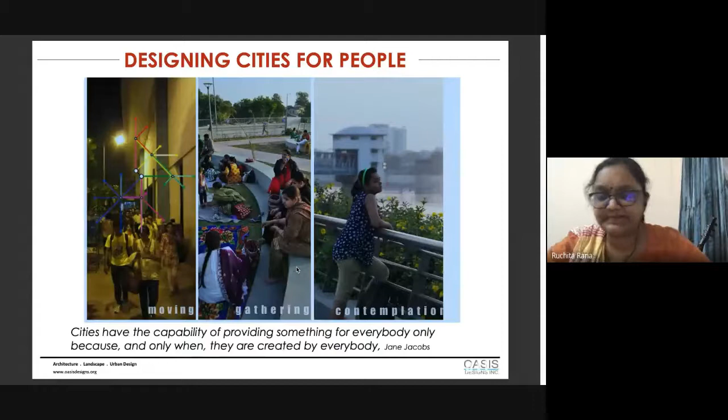So Oasis, actually I've been with Oasis for the past 12 years, and we have worked on different scales. We have combined mobility, water, sustainability to work in the realm of streetscapes, urban parks, waterfronts. So you name it, like any public project, and we have done it. So every project is different. We have done streetscapes in around 10 cities now, but even if there are similar problems, the solutions are all different. So I will just run you quickly through.

One more thing, I'm not getting into that whole debate of we don't need cars and we need walking and cycling, because I am assuming all of us are on the same page and we all believe that we need sustainable eco mobility, that is walking and cycling. And so I'm not getting into that part at all as to why we need walking and cycling, because I'm assuming that we all believe that we need to have streets not just for cars but for walking and cycling.

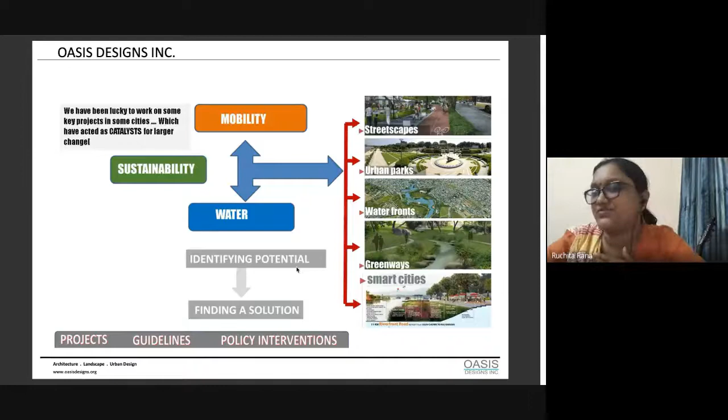Before this, we would put pictures of Singapore and Hong Kong and Manhattan, and we would say streets form the image of the city. But now we've got our very own JM Road, and it's actually become an identity. Even if you see it anywhere: oh, this is Pune and this is JM Road. So we have seen things transform, and we really now believe that streets form the image of a city.

You design a building, you design a park. Other than the landmarks, you don't really correlate to a city. It's only the streets, because the first thing when you land in a city is you always hit the street. So that's the memory that you have. Jaipur, if you go to the Chaupar, that's the memory of Jaipur. Somebody tells you Jaipur, it quickly comes to your mind: those nine grid pattern streets and stuff. So streets actually form the image of the city.

And streets actually is a big topic. If I want to open up, I can open up from a network planning aspect, from what should be the block size, what should be the distance of the streets that come in. They are mobility corridors, they are utility corridors, because they are easily accessible. And most of all, they are one of the largest platforms for human interaction.

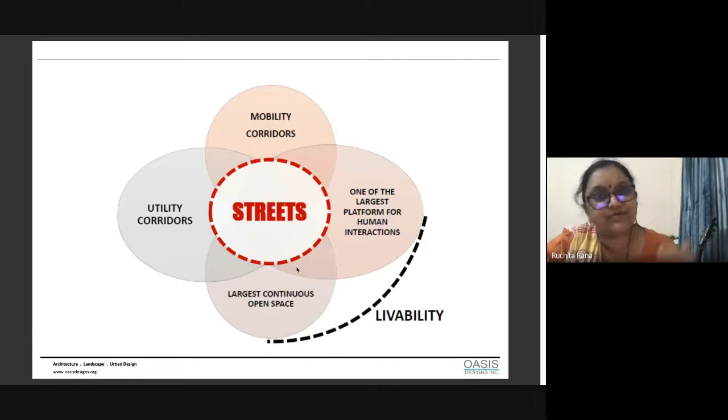The role of an urban designer is to ensure the streets have the livability, have the placemaking aspect, to create a memory, to create a picture in your mind. That is why I am here. I am not here to ensure that there is no traffic jam, or to see to the utilities. I am there, but my main aspect is how livable these streets can be. So I will just touch upon that part.

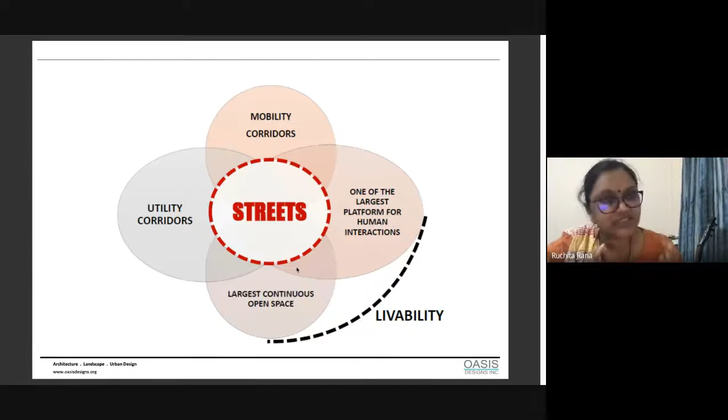So before getting into it, there are some non-negotiable points we always have. Every city has a different character and different challenges, but there are a few things which are non-negotiable. One is the equitable distribution of road space. This is one of the most important factors, because every time we go to any city, we are told there is no space on the road, we want more traffic lanes, why have you come, and who will cycle and who will walk. So ensuring equitable distribution of road space is very important, and for that we really need to question the traffic lane widths. We also need to question the IRC guidelines.

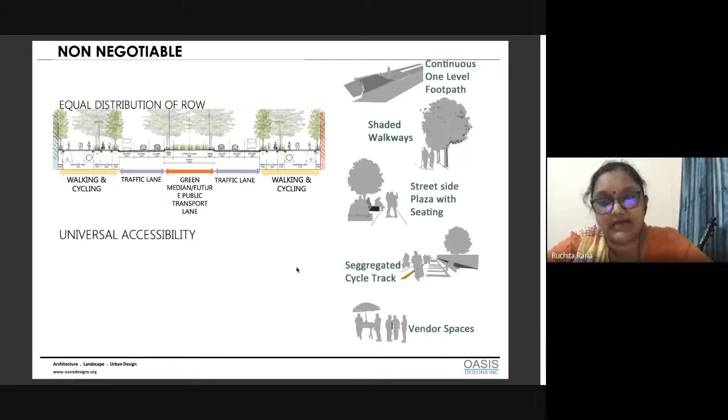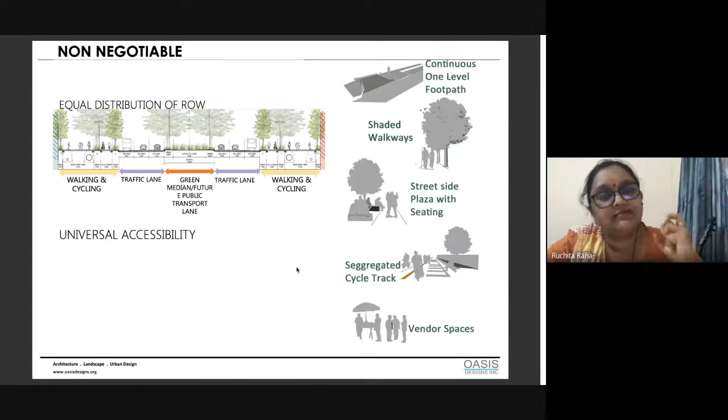We have guidelines, but we really need to question all of this, so we ensure equitable distribution of road space, universal accessibility, continuous one-level footpaths, shaded walkways, street-side plazas with seating, segregated cycle tracks wherever the road widths allow, and vendor spaces. So these are your non-negotiables. As I explain JM Road, I'll show how we got these non-negotiables on ground. This is what we did, nothing else, and that's how the whole project has come up.

So coming to the JM Road story. Broadly, it's the Pune Streetscape program. We were appointed by the Pune Corporation to do 35.5 kilometers of roads, some of which are mentioned here. JM Road is this road over here with 5 important junctions. As per the DP line, the development planning line, it's 36 meters, and the total length is around 1.87. Currently it is one-way traffic movement, and it will have a metro pretty soon.

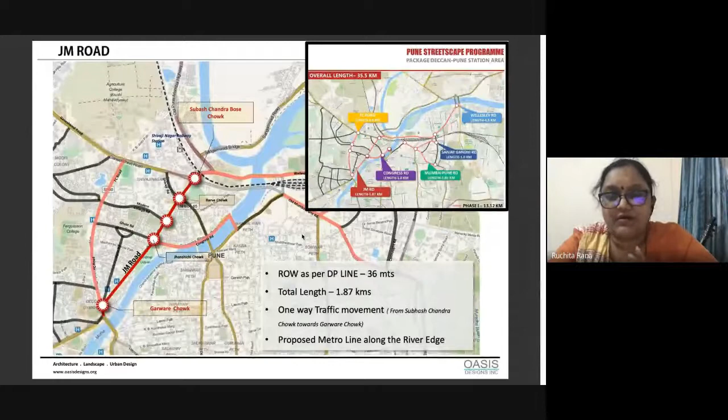So a broad placement of the project. Now the main spirit, you know, when we hit the site, we could just see the trees. That was the main spirit of this place. Every place has its spirit, and you just have to feel that. So we thought, okay, this place is only there because of those rain trees. So everything and anything has to happen with the trees around, you know, around those trees.

So now, like I told you, this is 36 meter ROW. This is one way, and still the engineers told me, madam, where is the place? I understand if it's a 15 meter ROW, there will never be space as per the engineers or the bureaucrats, because the cars would always want to encroach upon it, right? So just imagine 36 meter one-way traffic, and still we were told that there is no space. Maybe we can just go with walking, and we don't need a cycling track, who cycles, no one cycles, and all these kind of things.

So what we did was, we first started understanding, we zoomed out, we understood the character, and we saw how important JM Road is as part of the city network. So when we talk about whole to part, we saw that it actually forms an important city level link. So it needs to have some constant speed, it has to be friction free, but it had its own local dynamic. It was an important north-south connector, if you see over here, this road.

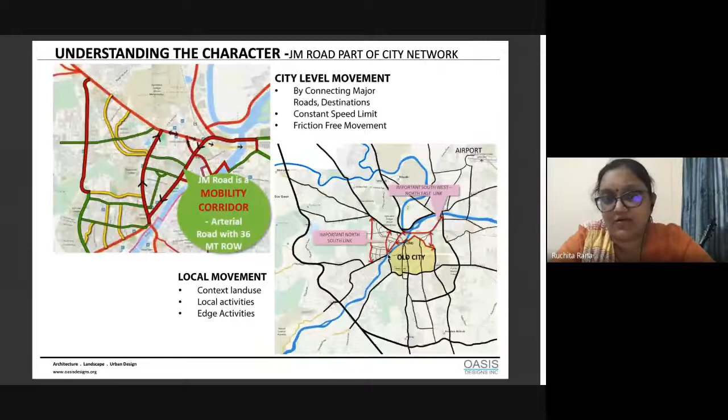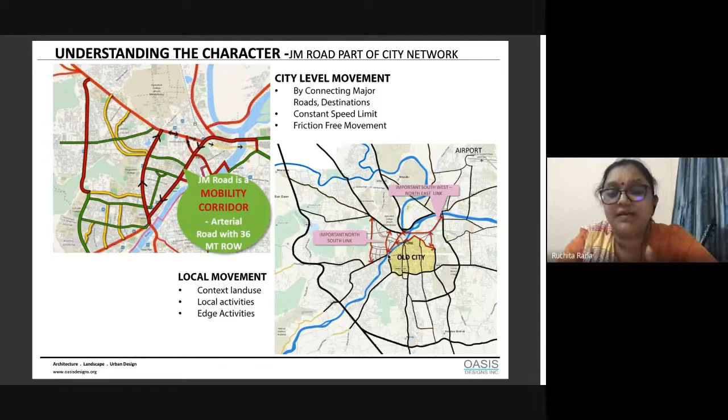So we understood the pros and cons. If we give it a city level network and ensure the speeds are high, like how it needs to happen for city level movement, then there was this friction of the local movement. So there was always this conflict. What is standard? As per standard, it was an arterial road, and it's supposed to be 50 kilometers per hour. And that high speed would be really unsafe for the pedestrians.

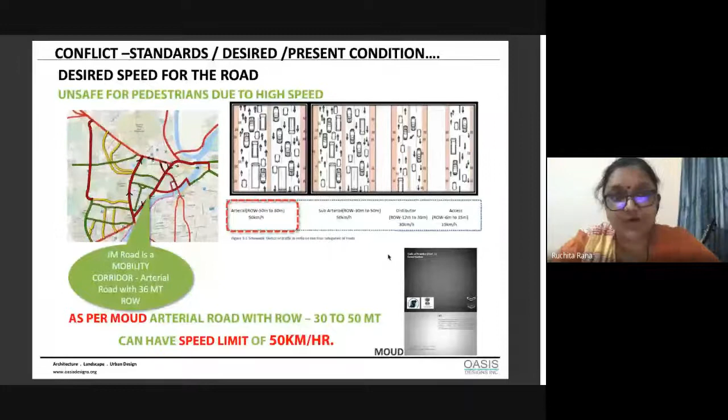As per MOUD guidelines, it's supposed to be planned at a 50 kilometer per hour speed. And that's it, the guidelines don't see what is the context, what is there on the ground, what kind of shops and edge, what is the present condition. So then our role comes into play, because they would be very happy to have 4 lanes over there and 50 kilometers per hour traffic, and they would have nailed it.

So we urban designers need to hold on to the sense of place, and the rest will keep happening. The transport guy will come and do his job, the utility guy will, but we as designers have to really hold on to this and fight for it. Even if it is required, as per context that's not possible. So after understanding the character and the existing bustling local commercial activities, we needed a speed of 30 kilometers per hour.

That's the first thing when we see a road, we say, okay, what is the required speed? And then we start giving recommendations, saying we don't need high speeds, and how do we maintain speeds at 30 kilometers per hour? So that's how the whole process starts. So we tried identifying the issues. Previously, this was two-way traffic.

Then due to some transport planning decisions, JM Road and FC Road were reorganized into a whole loop. JM Road became one way and FC Road became the other way. That is why you see it's a 36-meter ROW and still it is one way. So the tar space over here is huge. And the problem here is not traffic jams, the problem is high speeding, because there's so much space, people just speed.

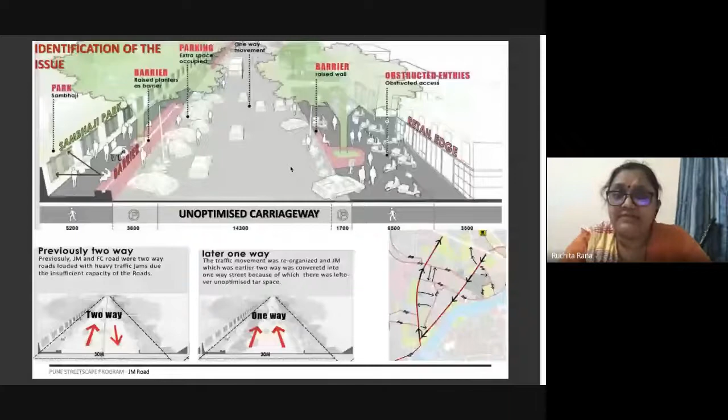That was one of the major issues, unoptimized carriageway, and we questioned that. Why so? So we had 14 to 15 meters available, and obviously the trees were our factors. So we said, okay, between the trees, however much you want, you can take it, but the trees have to be kept intact.

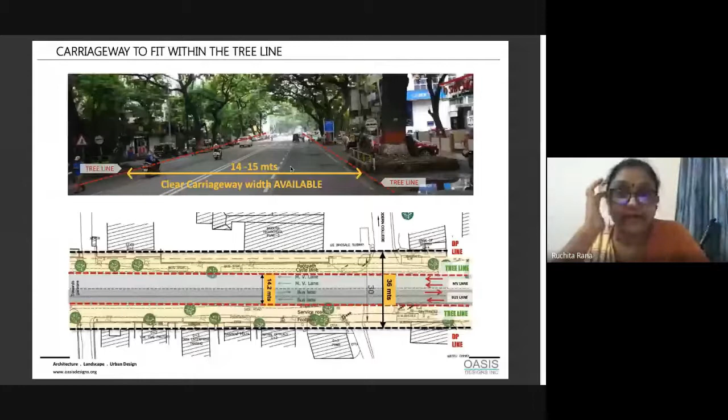Then there was this whole proposal of a segregated BRT. So we were told that there will be a BRT that will come in. So 2 lanes will go for vehicular and 2 lanes will go for the BRT. We had nothing against public transport. We are really happy to have public transport. But this road did not have the capacity to have a BRT because of the trees. We just had 14, 15 meters. And if we gave a BRT, we needed a service lane.

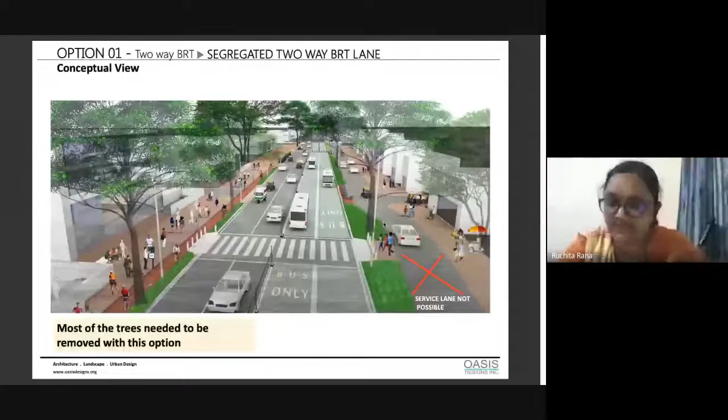So we actually went and did a lot of studies, and we did a rerouting plan for the BRT and convinced the authorities that if we have BRT in this place, we will have to cut all the trees. And that was something which we did not want. So we made presentations, though it was not in our scope of work. We went ahead and got some rerouting done and got permissions not to have BRT over here, and then the whole thing changed. So the final section looked like that.

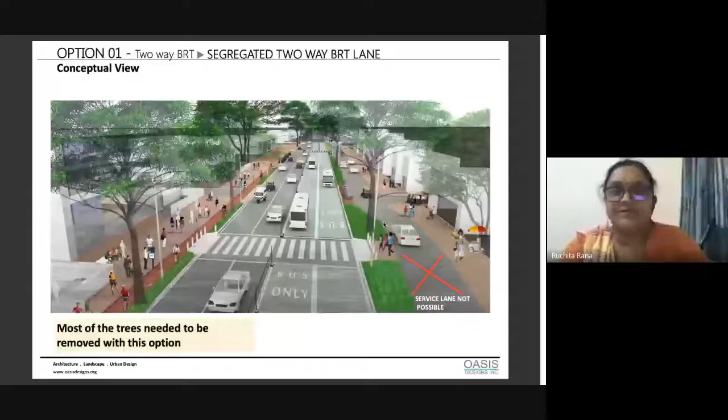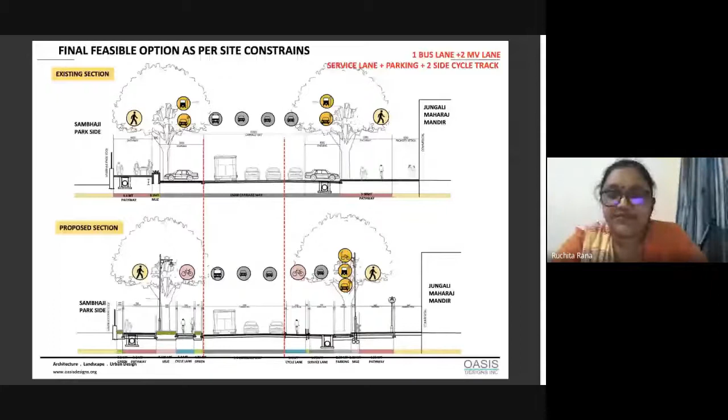If you see the existing road section, the top one actually just talks about carriageways, parking, and some level of walking, but it again would get encroached by parking. And we actually introduced cycle tracks on both sides and we had walking. So we made it an equitable distribution of road space with cycle tracks on both sides because we thought we could accommodate that. But for that, the 4 lanes of tar had to become 3 lanes of tar. Again, that was a very big issue.

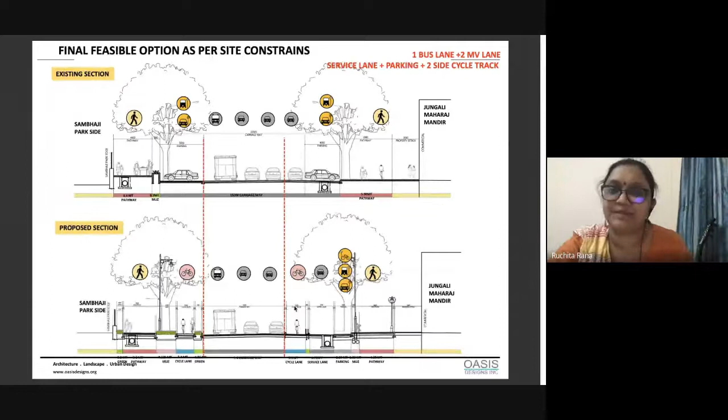Touching the tar line is a very big issue. Wherever we go, even if you get a permission from the commissioner, the on-site contractor will tell you, okay, you really want to break the tar? Why? I think we should include one more lane and have the tar. So that is the mindset of people. So, okay, we said, fine.

You can't design for it all in one go. You have a vision in your mind, but you will just design for the present. You can't say, no, I have planned that there has to be 2 lanes of cycle track and I will go for it. Your project will get stalled. It's a public project. There are so many stakeholders. You don't even know who your stakeholders are.

So we said, fine, let's have a cycle track on one side. And once we get a win-win situation, maybe in phase 2, we could have a cycle track on the other side. Maybe people will come up and tell us, oh, please give us a cycle track on the other side, we want it like that. So you plan for the whole section, but you can never implement the whole project in one go. It has to happen in phases. And you will not be there in the project forever; you would be there for 2 years and then what happens?

So you have to build ecosystems. You have to leave some kind of traces behind you, so that there are people who fight and who would get this implemented. So then we had a lot of NGOs and researchers, we had ITDP coming in, and a lot of people with whom we had discussions on the table, and then we all agreed to it. Phase 2 can happen later, and in phase 1 we have a cycle track on one side.

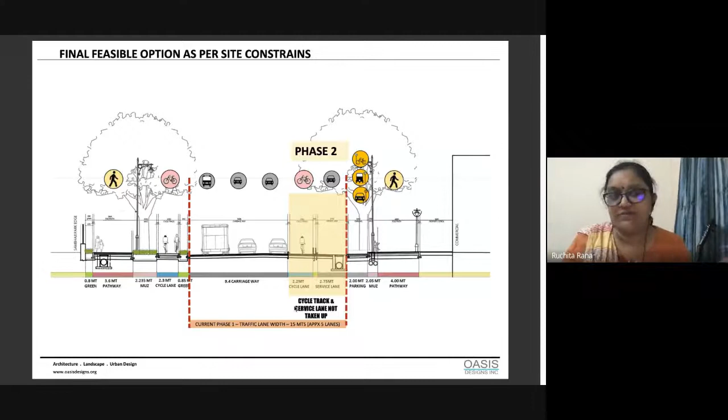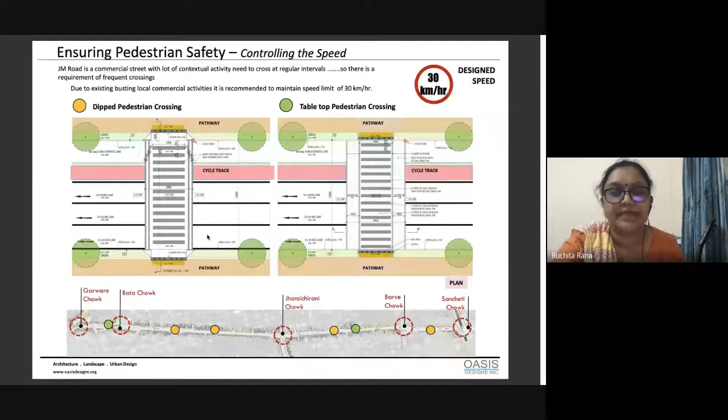So that was one aspect of how we actually designed for a particular speed, how we got the sections right and how we gave these kind of speed barriers. Second main issue is designing edge to edge. We are being told that you design for the whole ROW, 36 meters. But what do you mean by 36 meters? We have been asked to do from boundary wall to boundary wall.

As per DP line, this is supposed to be 36 meters, but as per actual, only 30 meters was available. Because the master plan has been created, but on ground there are a lot of buildings which are as per the old guidelines and the old rules. Only once they redevelop will we get the complete 36 meters, which may happen in 15 years, 20 years, we don't even know.

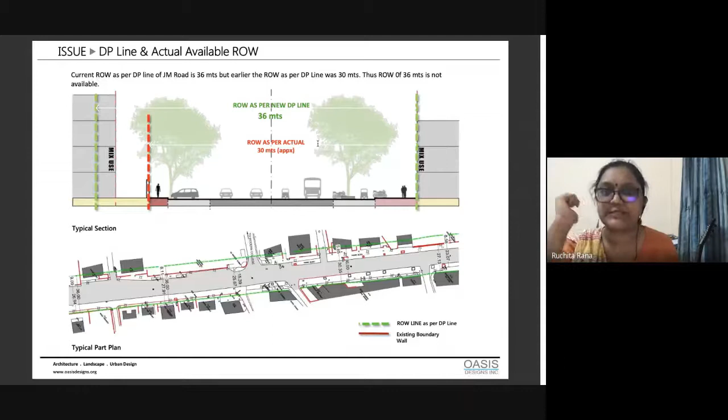So this is my 30-meter line and I have demarcated the setback design by a texture change or by some kind of element placement. So there is a visual thing of, okay, this is the 30-meter and this is the 36-meter line, and still it looks seamless. This happened because people actually wanted their fronts to look good, to have nice paved and level ground. The shopkeepers actually came up and said, please take our setbacks and design it for us and make it seamless. So that's why this became like this.

So that's how you have to navigate and negotiate to get to this level. This is how it was, and now it looks like this. The parking was pushed back and stuff like that. But there is a lack of control on setbacks of private property. Even now, if you see these pictures, these are after we have made it, and people are still parking on the footpaths. The two-wheelers are still there. So there is a big issue of encroachment and enforcement. There is lack of enforcement, that is why people are doing that. I agree. We spend so much money, and then people are parking like that.

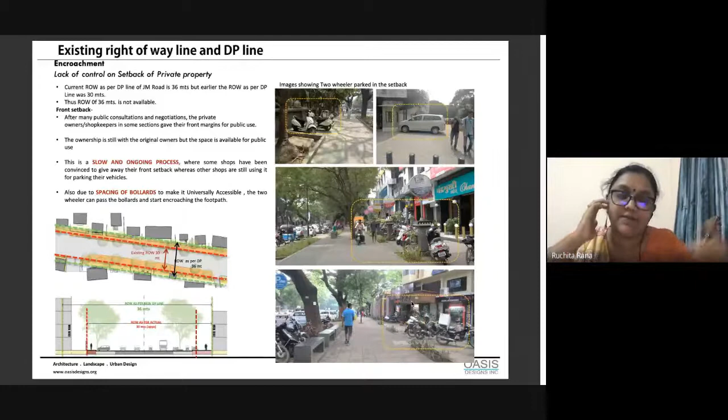And the second issue was spacing of bollards. If you give as per standards, then all your motorcycles can actually come inside. So how do you place your bollards? That was again a major discussion, because there were people, NGOs, ensuring that it has to be universally accessible and wheelchairs could go. First we started putting bollards at 750 distance, because we did not want bikes to go, it could stop their leg guard. But then people came and said, no, the wheelchair user also has to go in. So there were a lot of these discussions and negotiations, and then we would create our own standards for these kinds of projects.

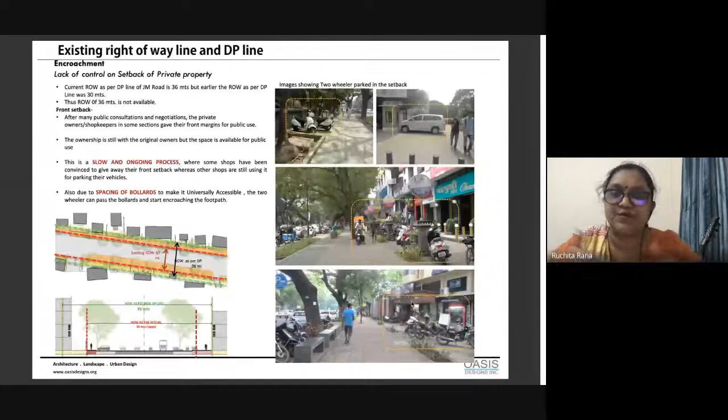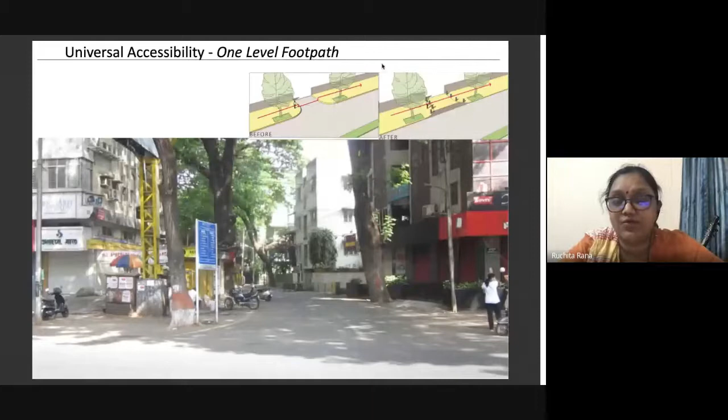So how did we achieve this universal accessibility? One very important thing, and non-negotiable, is we need one level footpath. Right now, wherever there's a junction, wherever there is a gate, you go down and go up. So we actually went ahead and created one level footpath. Now I think most of the cities are adopting this concept and are doing it. So these are a few pictures of how we did it.

And we removed bollards from the cycle track because it was becoming very difficult for the cyclists to navigate through bollards. If you have bollards, then cyclists will not come on the cycle track. And if you don't have bollards, then the two-wheelers will come. So we took a decision that it's okay, let the two-wheeler come, but at least let the cyclist also cycle on the cycle track, otherwise it will not be used. There are always these kind of decisions that you have to take, which are correct for that moment, for that site. Maybe in some other cities there might be different difficulties and a different solution will come out in that city.

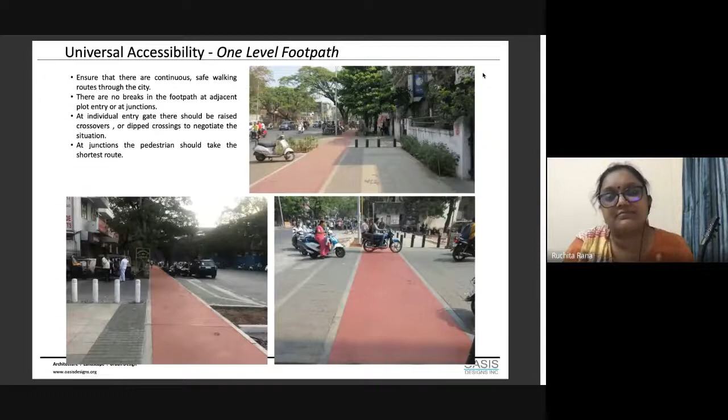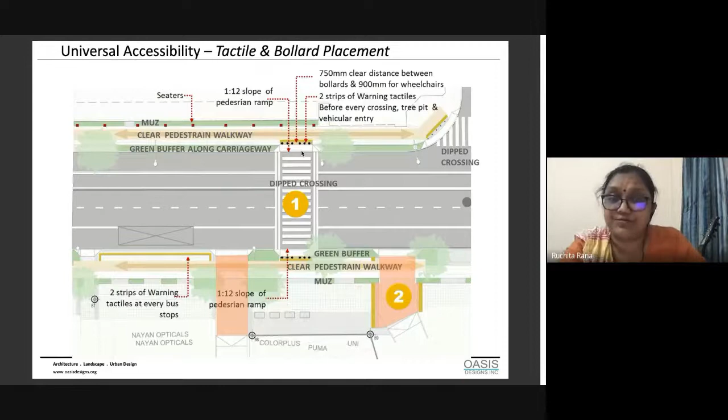So this is how we actually go about doing the detailing of how do we put that tactile, how do we do the bollard. If you see in the bollard also, only the middle one is slightly wider for the wheelchair person, the rest are all at 750 millimeters. So these are the kind of details we created so that we ensure that two-wheelers don't encroach on the footpath space. So these are a few pictures of how it looks now.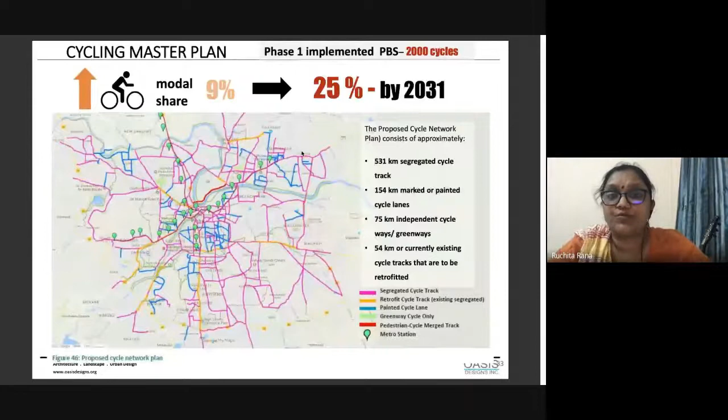Cycle track, parking management, utilities, infrastructure. These are a few parts of the project. Pune already has a cycling master plan and phase 1 is implemented. PBS is public bike share. They already have 2,000 cycles and they are saying in 2031 they would want to bring it to 25%. So at JM Road we have 50 cycles at 5 places. They asked us that they wanted so many cycles to be placed, so we told them, okay, these are the places where you could have your PBS stands placed. So that's how we integrated with the cycling master plan proposal.

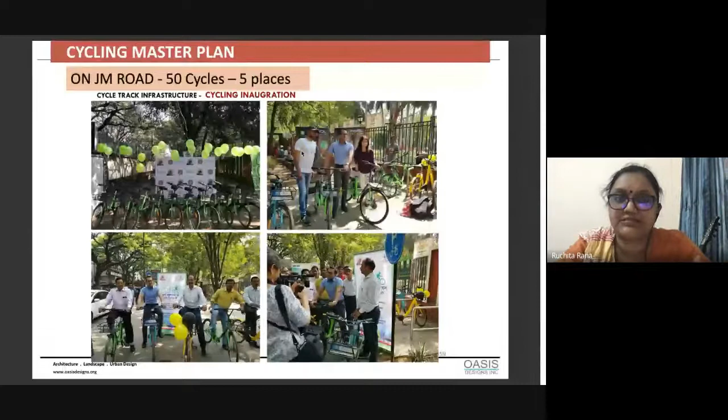And like I already told you, we placed bollards on the cycle track and it was really difficult for the cyclist to navigate. So then we had to remove it, so at least it was seamless for him to travel on these cycle tracks. There were a lot of trees, and we are against cutting any trees, so we had to meander those cycle tracks, but now it's like a fun trip for them because it's that wavy kind of a trip, so they enjoy it.

And now these kind of activities have started happening, they have cycling races, and then they have these skateboard things. So a lot of changes have started. The phenomenon of mindset change has started. Like I told you, it's a whole cultural change. It happens slowly. It will never happen that today you made a cycle track and tomorrow you see 100 cyclists cycling on it. Even now we see 10 of them and we are so happy that somebody is using those cycle tracks.

Then we had services placed, and parking was another big issue. I have attended a lot of juries and seminars, and what students do is a very good activity analysis, so much parking is there. And then in the proposal, all the parking is gone. I also wish that in practical life all the parking just goes away, like in the drawing: existing, and proposed no parking. I don't need to design for parking. But in reality, this doesn't happen.

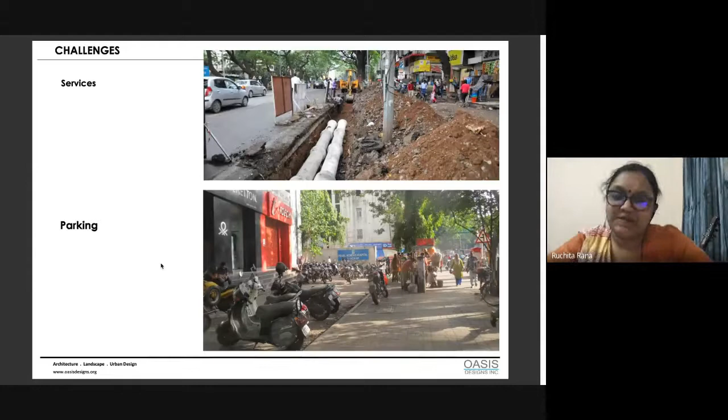You tell your dad, don't park in front of your shop, I want to make a parklet over there. He will kick you. He will say, go and do it in someone else's parking, don't come and touch my parking. So parking is a very big issue, in my house or in your house, everybody's house. Pune has a parking policy.

Apparently, Pune is a very progressive city. It has a lot of policies in place, a lot of mechanisms we could fall back on. We can say, okay, there is a parking policy, we need to implement it. So those kind of systems were in place.

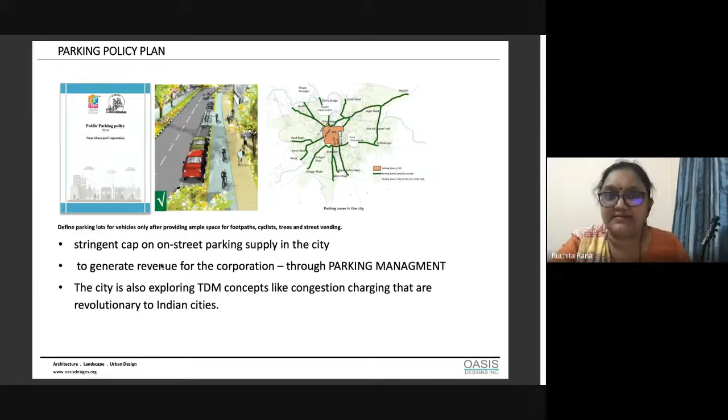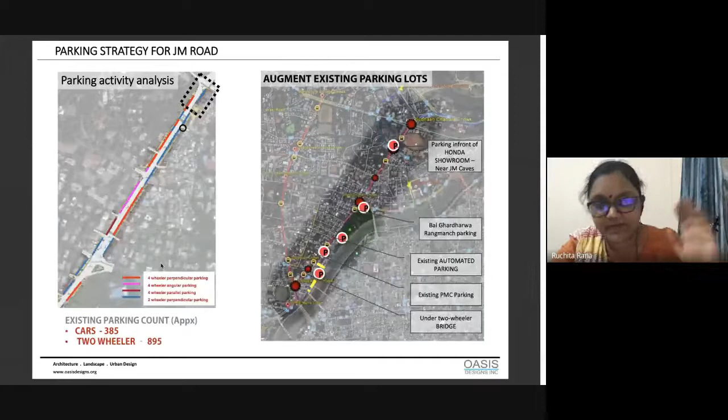So we also did activity analysis, not as extensive as you guys do, but putting each and every parking and showing it in detail, and we came up with these numbers. What we did was we identified spots where we could have parking lots, or where there were already government lots which were vacant, existing lots, or under bridges; these kind of consolidated parking could be used.

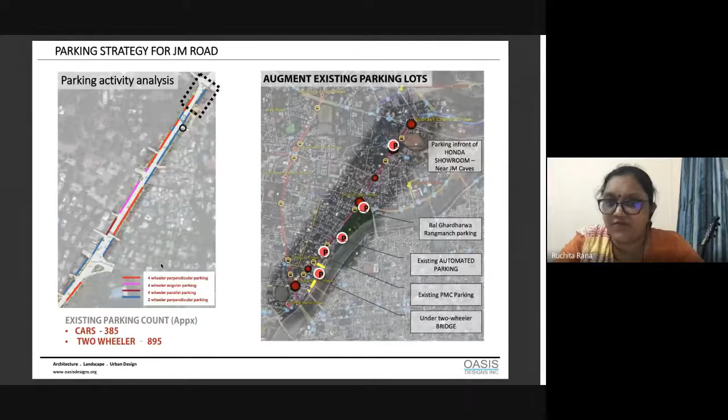So we actually went and did a recce of that area. We told the government that we can augment their parking lots and use them, so we can cater to the numbers that we have counted. So we have parking somewhere, we don't have parking somewhere, but we have not wished away parking completely. It is not possible at all. Again, there will be stakeholders and there will be stay orders, and we will not move.

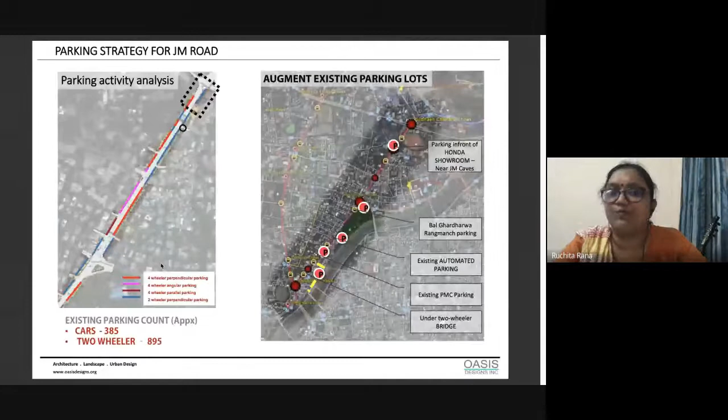And one thing we were very clear on, that we would remove all perpendicular parking and provide mostly two-wheeler parking. Cars could park in the by lanes. With two-wheelers, we accommodate more people, more catchment, and cars could go in the by lanes. That was one thing we were very adamant about. Even if we gave any car parking, we made it parallel, no perpendicular parking. So we got some amount of space.

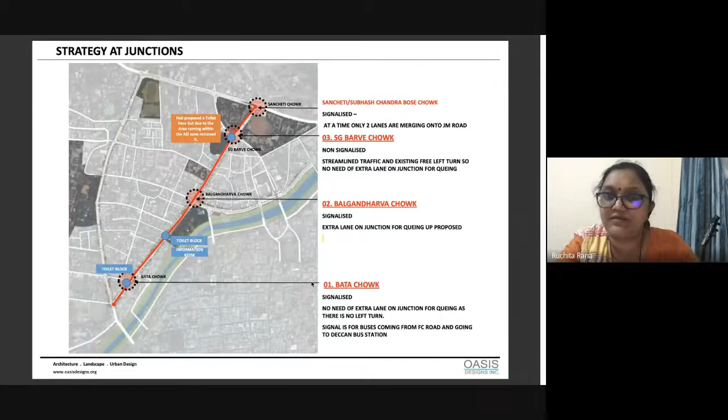Then junction design is another very important aspect. I'll rush because I've already completed half an hour. So we had these junctions. I will very quickly explain one junction and the changes we went for. This is Jhanshichi Rani Chowk, which is the center over here.

If you see over here, the junction had this beautiful green, but it was not accessible. People actually had to take a turn and go from the road. They had a toe wall; they did not want people to come into this field. It's okay even if they die on those roads, it's fine, but you cannot come in.

So we had a lot of stakeholder sessions. We met MLAs there, because these kind of things are linked with the MLA. Some MLA had this garden made. So it's not just engineers. You also have to go and talk it out with the MLA and explain to them the intent of the project.

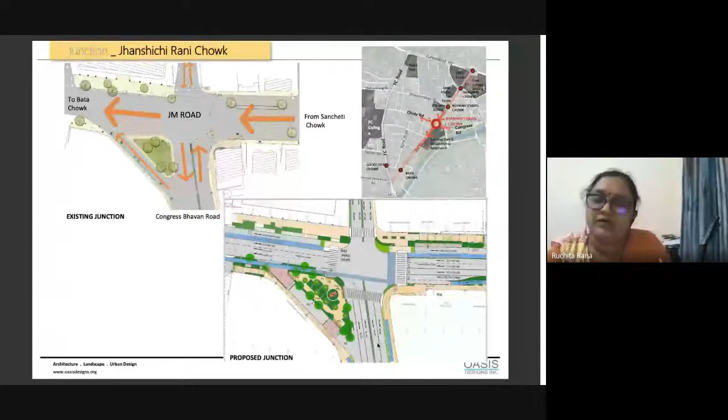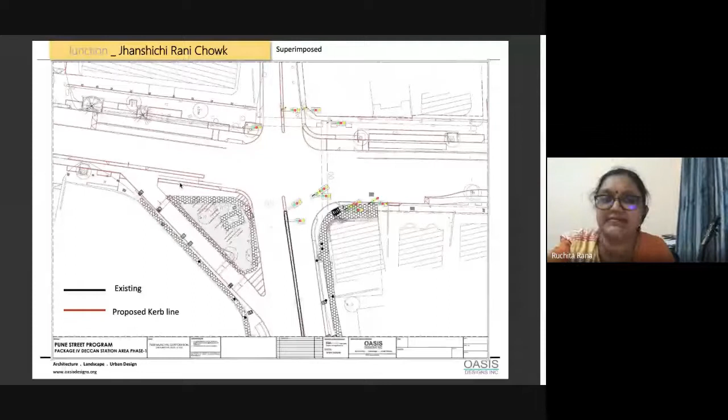This is how that junction looked, and this is how we finally got to do it. We reclaimed the square, or triangle so to say, and designed it accordingly. This drawing shows the existing in black and how we reclaimed this whole tar space and made it a plaza.

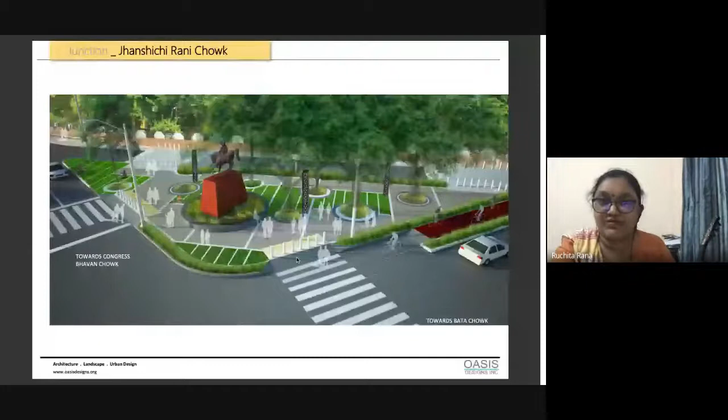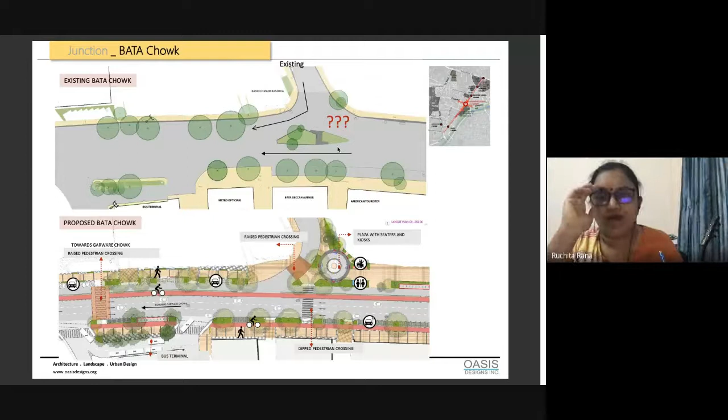This is another junction, Bata Chowk. Because this was a one-way road, this slip road was not required, but it was there. We reclaimed that whole slip road and made it a plaza. Even when we were doing it, people were like, why do you want to remove the tar? Let the tar be. People love tar. Just give them tar space and they're very happy.

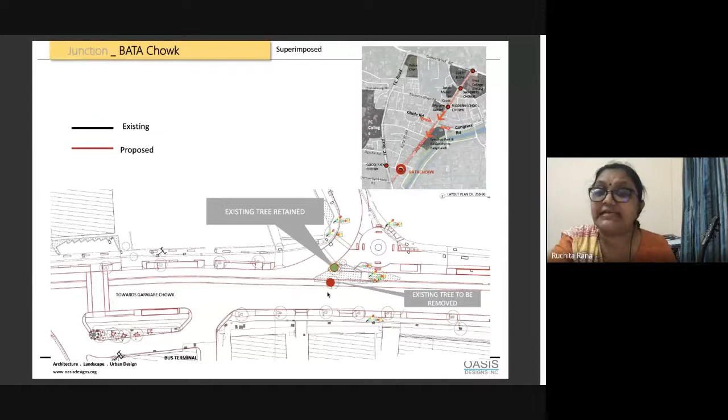So, if you see, we have actually reclaimed that whole space. We realigned the road because there were trees coming in, and we didn't want to cut them. So, accordingly, we redesigned that whole junction and the whole plaza. So, now this is how it is.

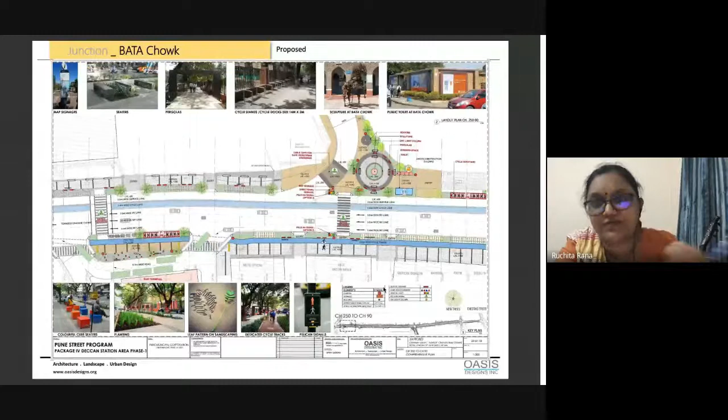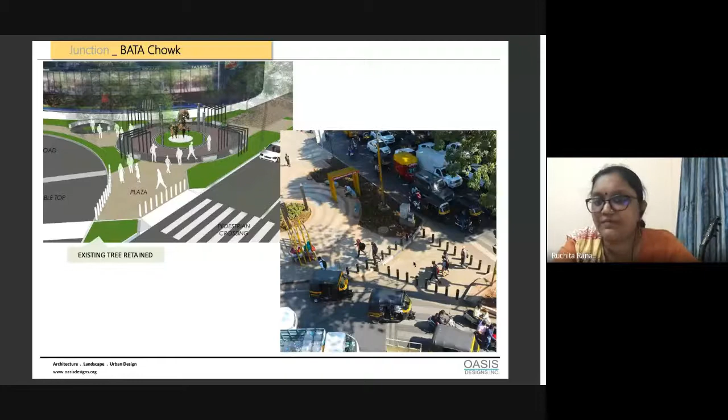These are the spaces where people can actually sit while the light is red, so they don't need to wait on the edge of the road and can save themselves from getting hit by any car.

Now, quickly I will run you through the most interesting part of this project, that is the quick win, the Sambhaji Park area. What is very important in any project is the quick win, where you quickly win over the people around. People say, wow, something really good is coming on my road and this project is going to transform this whole thing. If you nail that, half your fight is over.

You can just say, see what we did for that area, the same thing will happen for this area. So what we did was we needed a stretch where we could wish away parking. We needed an edge which didn't have any kind of stakeholder clashes. So we took this park edge because we knew even if we remove the parking, nobody will come and question us why we removed the parking from in front of their shop.

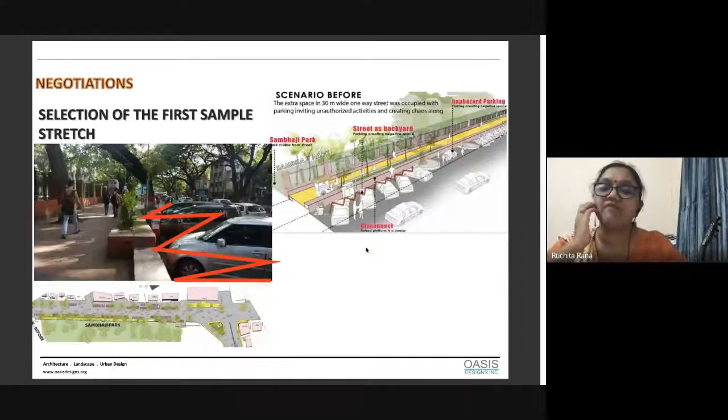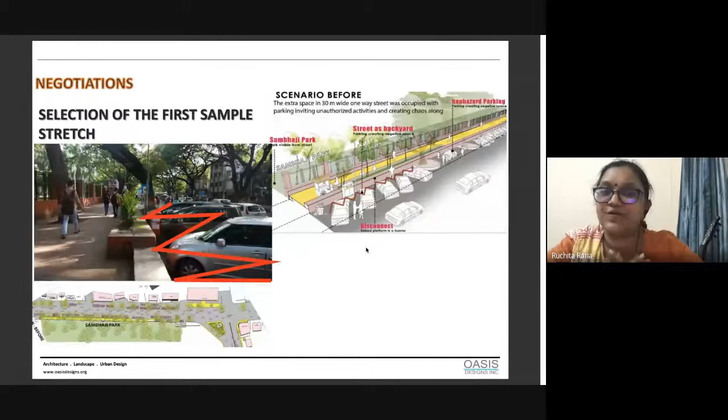Because in India they think it's a birthright, and if they have bought a shop, then automatically the road in front of the shop becomes their property. So we took this as our sample stretch. We removed the parking. That was the very first thing that we did.

We needed to create a unique, innovative placemaking exercise. It had to be seamlessly connected to the immediate context, with the addition of many activity layers without sacrificing the non-negotiables that I've already told you, and it had to be a unique place. It had to be an identity. So this is the park area that I'm talking about, and this is how it looks.

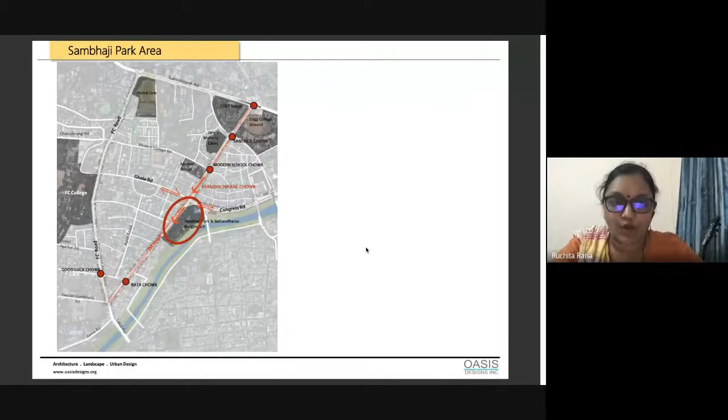It has parking. The whole footpath is on a raised level. I'll show you a picture. The footpath is actually raised to 0.5 meter height, and it actually looked like this. I know you would not even be able to imagine in your dreams that what you see now is what it was. This is what it was. So our first thing was to remove parking and reclaim the public realm.

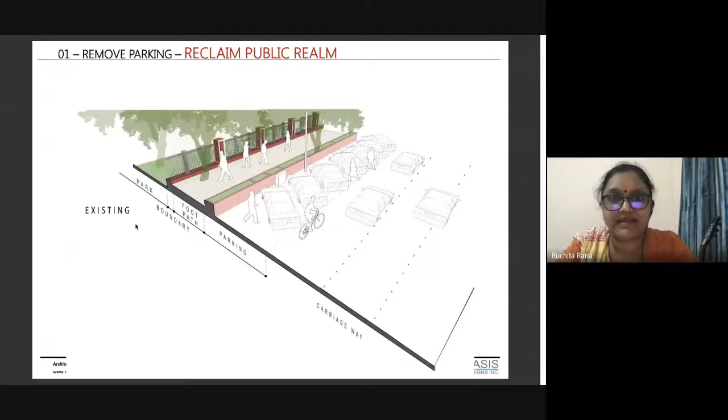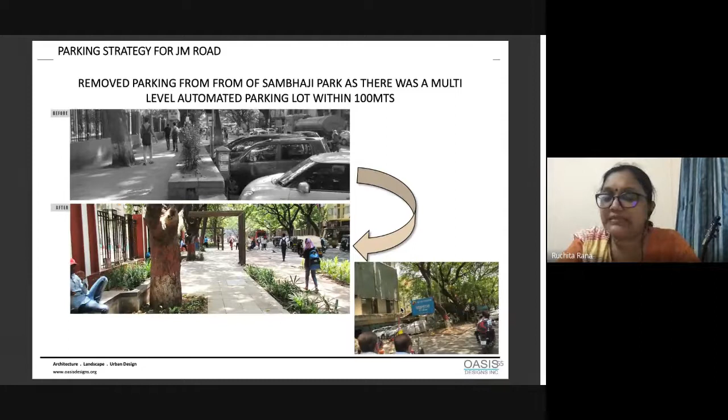The good part was there was already a multi-level parking near this park, and it was not being used to its capacity. So once we removed the parking, people started parking in that multi-level automated car park, and it started getting used. After removing this, we got a clear stretch.

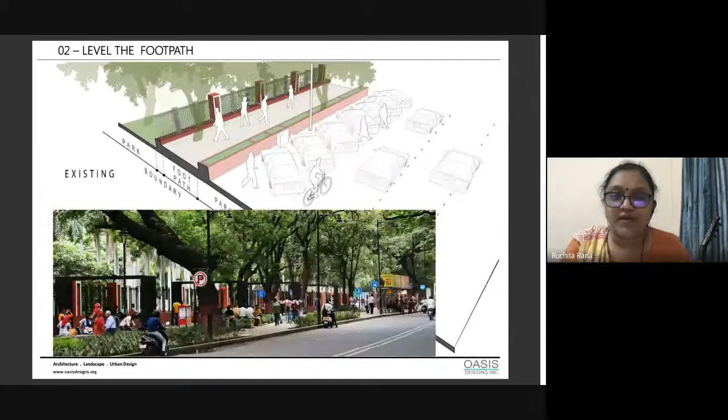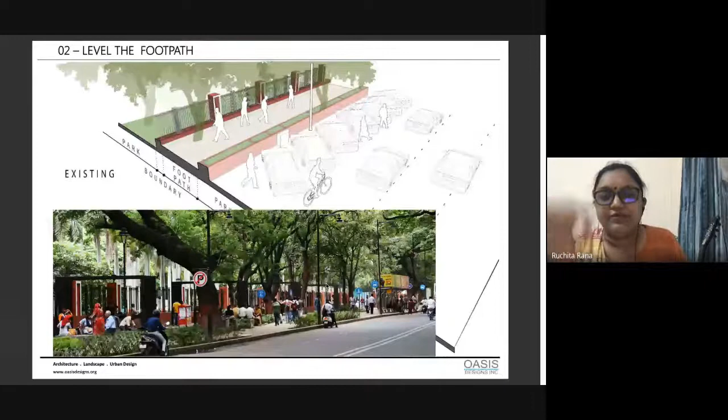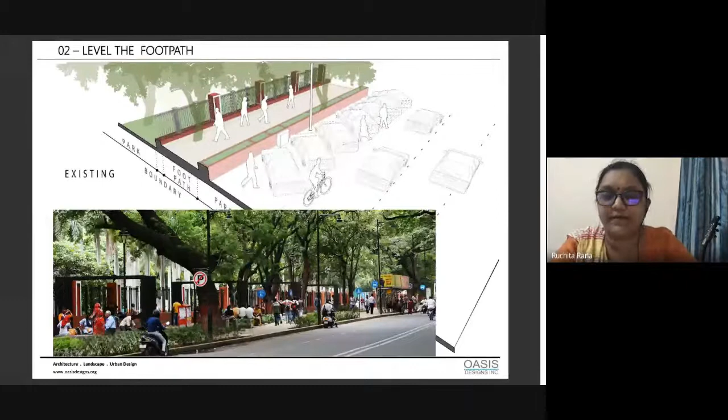The second thing was we wanted to bring the footpath down to 150 mm. That's the standard, and that's what we all should follow. People say cars will come up. Nothing will happen. The way you design, everything can be sorted. You give a green buffer, and cars will never come on your footpath. So we brought this down, and this is how it is. It's seamless. We can now see it from the road, and people sitting there can see the other way. So we leveled the footpath.

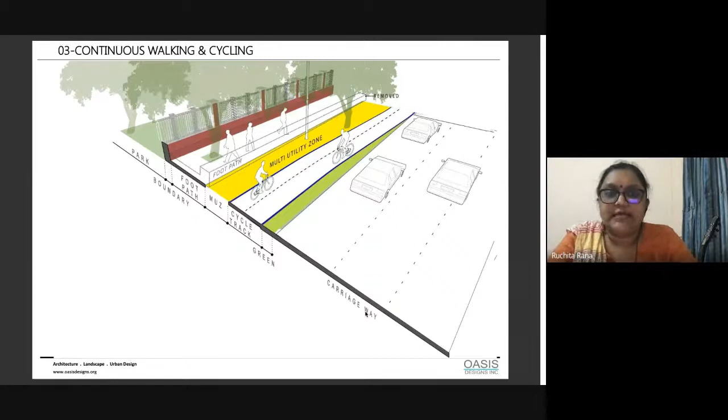This was the condition at the end, and this is how it is now. In fact, it's ulta ho gaya, actually because of the road level. Next was providing walking and cycling, the two non-negotiables we had to do. So we placed those lines, and this is what we've got.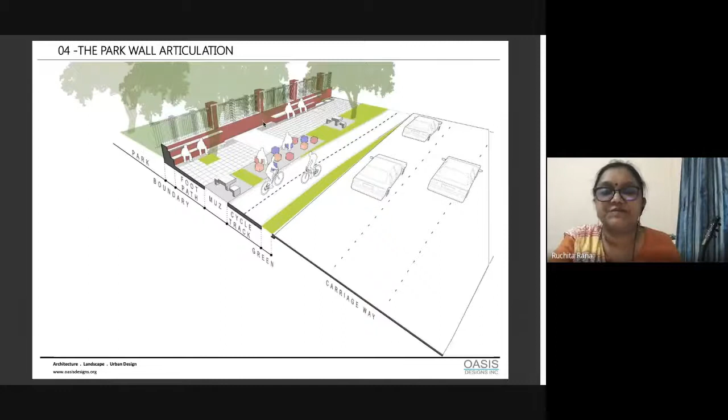Then was the park wall. Because we brought the footpath down, this was more visible. So we needed to have something here so it doesn't look like a dead wall. We started placing these step seaters, which became an interesting sit-out where kids now come and sit and enjoy. It looks into the park and outward as well.

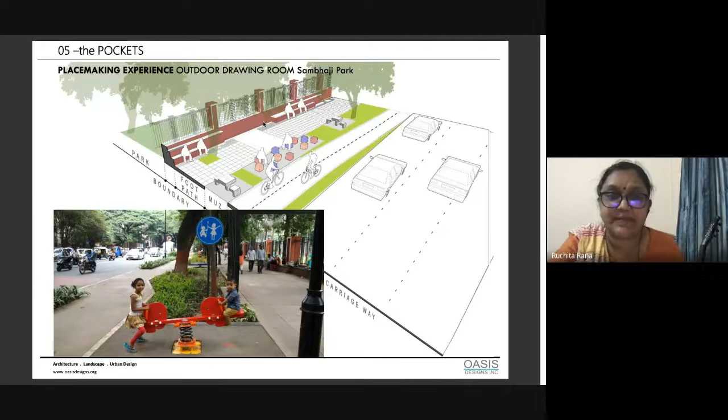Then we started creating these pockets in between the walking and cycling. We had these kids' play areas. We wanted an outdoor drawing room kind of feel. People here are sitting. So there were different interpretations of these pockets that were created. This is the seesaw that we have.

And so this again has another story. So there was the police station over here, and there was a chaiwala who was here, and keeping him in mind, so it's in his memory. So keeping him in mind, we said we will have a nice sit-out space so people can come and have chai, like how in Ahmedabad people have.

So once the construction all started, the chaiwala was pushed off and he was standing here and there. And then again, when the project was done, everything was ready. When we went to site, we said, please get that chaiwala. We have created a space for him and stuff. So there were some kind of political and bureaucratic things. Some vendor issues were there.

So actually, the chaiwala didn't apparently come. So whenever we would go, we would pull him and tell him, "You stand over here." But then whenever we would go back to Delhi, he would be chucked out. But we captured the soul of this place, like how in Manikchowk, you would have learned, even Law Garden in that case. So even if you don't give the infrastructure, because that place has something in it, it will thrive. So the place still thrived, because it had that spirit, yes, it is a place where people have to come and gather.

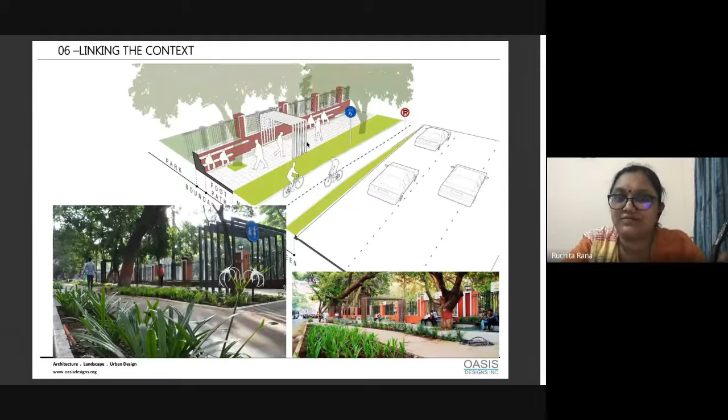And then last was we needed something to tie in with the wall. This Sambhaji Park wall was something which was very different, and that was the character of this area. So we actually got these kind of frames, and we said we want to bring the park out. So it is an extension of the park. So this is what is happening now. It's actually now looking like an extension of the park. And I think in some time you will not even think that there is a wall. You would just think that the park is being seamlessly connected to it.

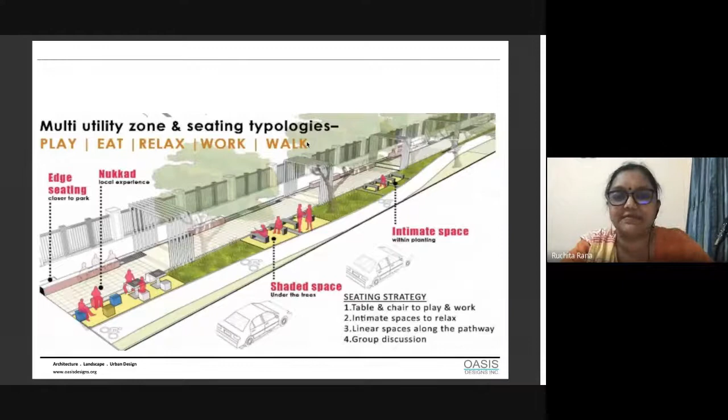So finally, we managed to create this small place where people could play, eat, relax, work, walk. So we kind of created a magnet for this place. So this is a USP of this place, basically. So this is how it was, and this is what it has become. So when you see what it was, I think you would get the idea, the content, the fight that goes in it.

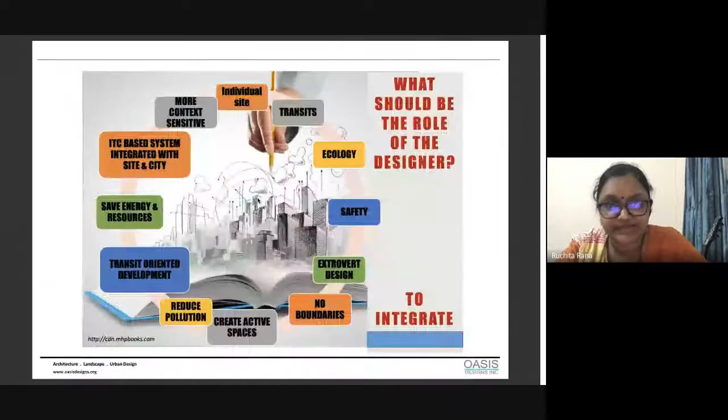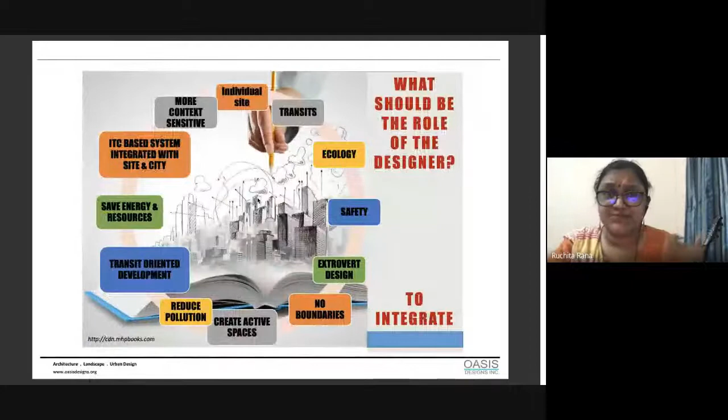So how do you integrate ecology, safety? There should be no boundaries, active spaces, pollution, transit-oriented development, energy and resource, save energy. So you have to have your non-negotiables and just move ahead.

Our cities actually are working in silos. There are so many departments. Like this, in case of Delhi, we have Delhi Jal Board. So even in Ahmedabad, the metro guy will not talk to the engineer, will not talk to the PWD. So there's all sorts of stakeholders there. And you are the person who has been sent to actually tag them up and bring them all on the same table and put it all in the same platter.

So we get something that we got in JM Road, which is no miracle. It's only sheer patience, passion, and become like an activist and say, yes, I have to do it. I need to just break that wall and the barrier. So good planning and design, effective, efficient coordination, and stringent enforcement are the key features.

And it's always a constant tug of war. You are always debating, you're always negotiating, you need to phase the project. You can never design a project in one go, and you have to be very flexible.

So that's it. I remember in my jury there was BV Doshi when I was in UD, and he came and he told us, you guys are the most important people in this world, because buildings come, they go, buildings break. What you are designing is the void, and that void will always be there, and you have to design it so that it changes with time. So that's the power of designing public realm, and that's the challenge.